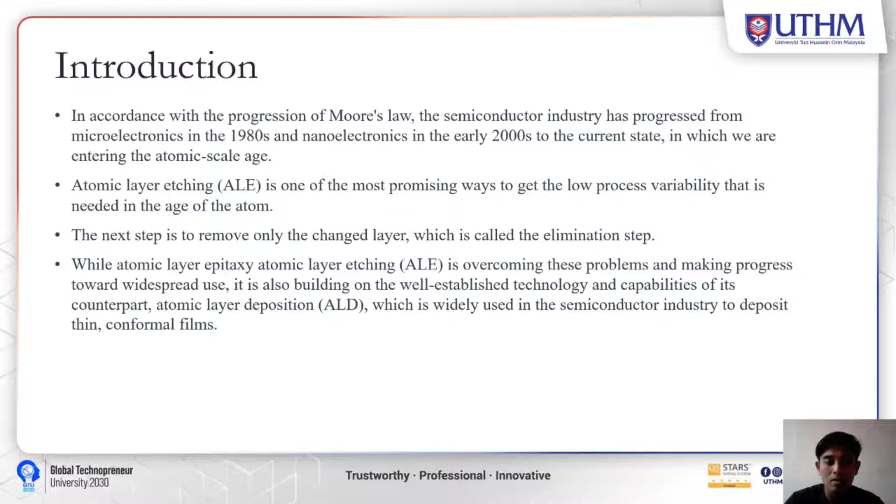The next step is to remove only the changed layer, which is called the elimination step. Ions make it possible to etch in a certain direction, which is needed to make structures that are deep and narrow. Lastly, atomic layer etching is overcoming this problem and making progress toward widespread use. It is also building on the well-established technology and capabilities of its counterpart, atomic layer deposition, which is widely used in the semiconductor industry to deposit thin conformal films. Okay, next we go to problem statement.

First, one reason is that high volume manufacturing needs to be cost effective, and a multi-step process like atomic layer etching can have low throughput because the reaction steps are slow or because it takes a long time to switch from one step to the next. One of the first studies on silicon atomic layer etching said that a single cycle took more than 3 hours. This shows how long the process takes. Most of the time, lab cycle times for silicon atomic layer etching have ranged from 1 minute to more than 5 minutes.

Second, new approaches geared toward manufacturing are being made to make atomic layer etching faster and cheaper. Atomic layer etching with plasma can be used with existing etching equipment. Atomic layer etching can be used as a final touch-up after continuous etching, and more advanced control systems can be made for faster gas modulation.

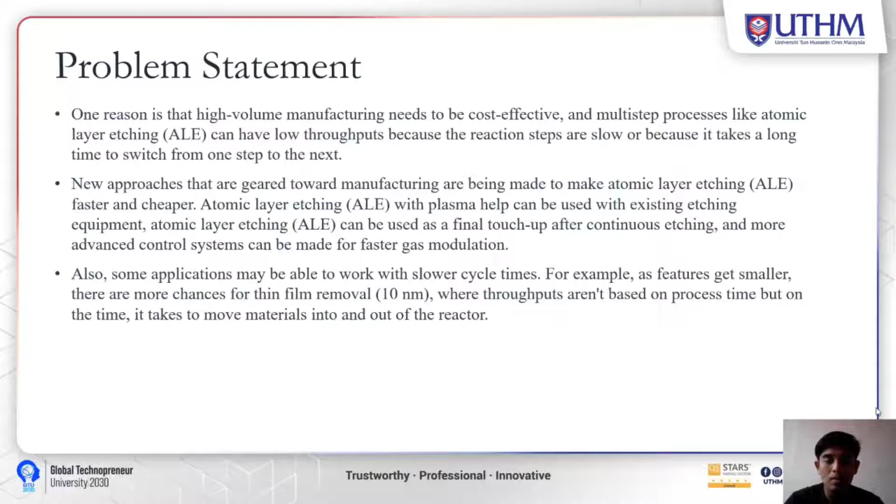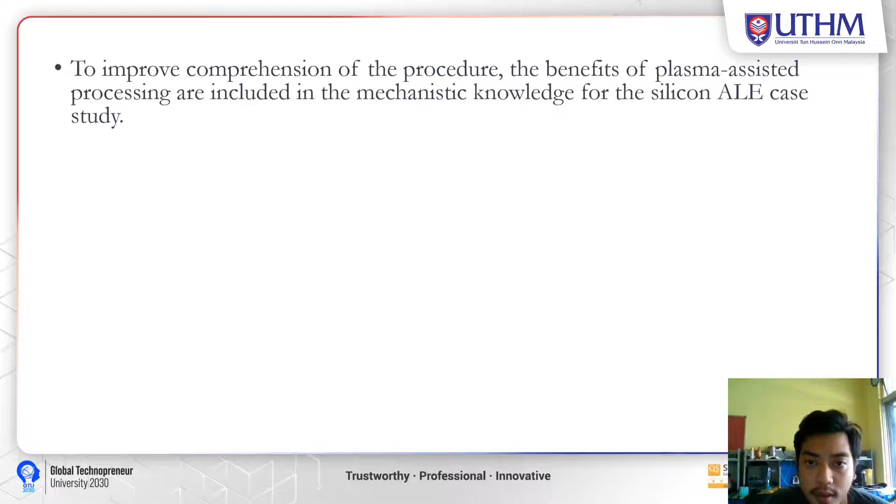My matric number is AE190031. So today I will present my part, which is the future. For the first point, to improve comprehension of the procedure, the benefits of plasma-assisted processing are included in the mechanistic knowledge for the silicon ALE case study. Next, acceptable feature size variability is anticipated to be on the order of silicon atoms during the next 10 years, including contributions from surface flaws.

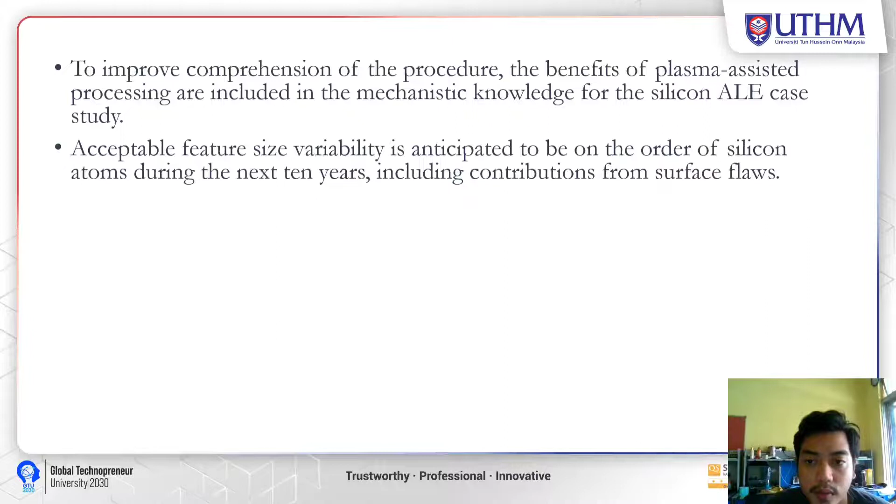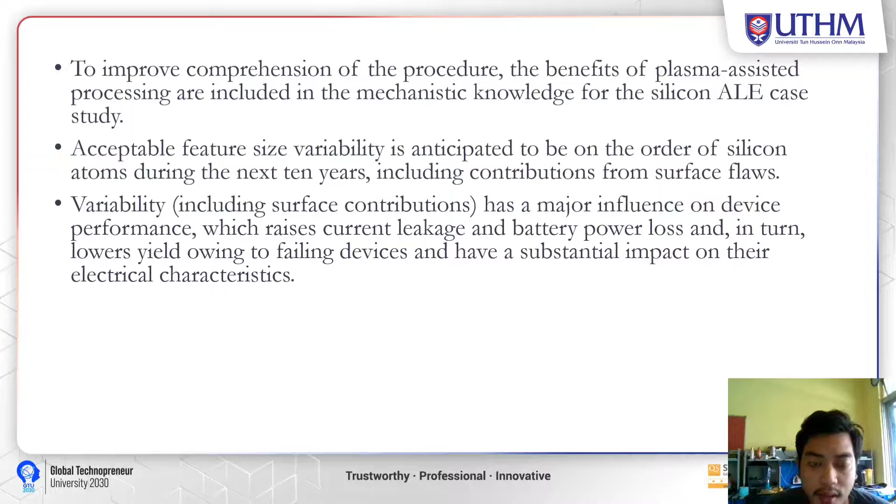Variability, including surface contributions, has a major influence on device performance, which raises current leakage and battery power loss, and in turn lowers yield owing to failing devices and has a substantial impact on their electrical characteristics. And the significance of cutting-edge plasma approaches for regulating ion energy distributions arriving at the wafer and plasma species formation routes is then brought to light for a successful plasma-assisted ALE.

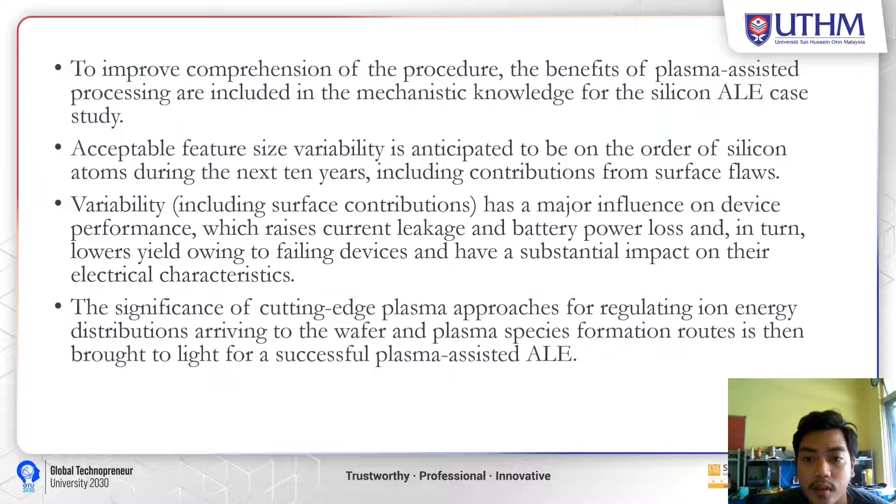Now I will explain the discussion part of our project. One of the topics in our review paper discusses the atomic layer etching ALE criteria, which consist of two steps: the modification and the removal. The modification step forms a thin reactive surface with a well-defined thickness that is more easily removed than unmodified material. And the removal step eliminates the modified layer while keeping the fundamental substrate intact.

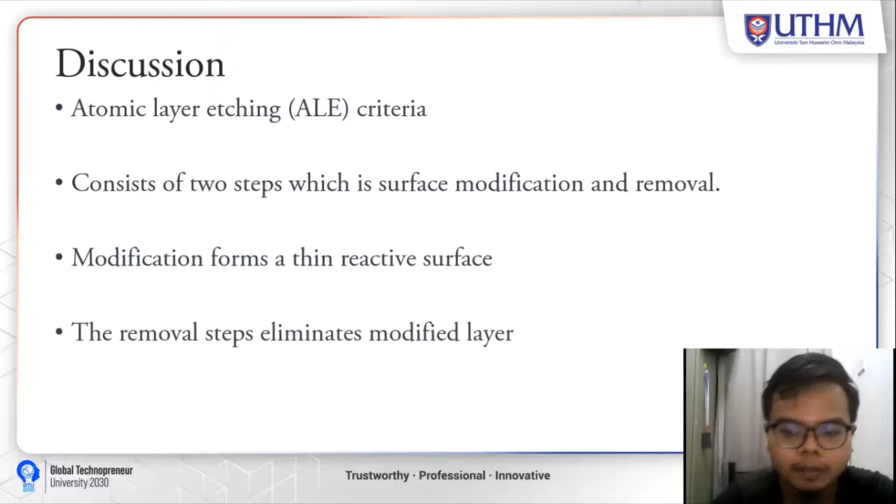Next, one of the topics discussed also involves the characterization tests, which are 3 independent tests to characterize ALE: the first is the synergy test, the second is the saturation curve, and the third one, less frequently used, involves the energy scan. These tests help to specify to what degree the ALE process approaches its ideal behavior.

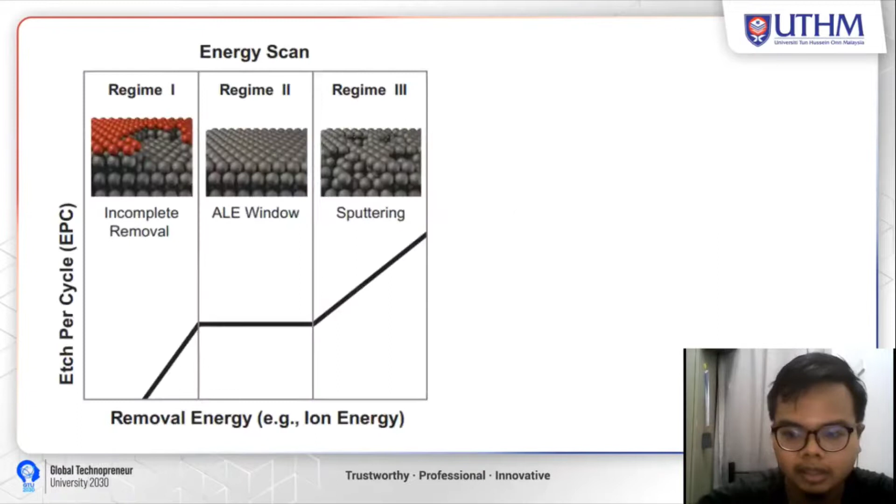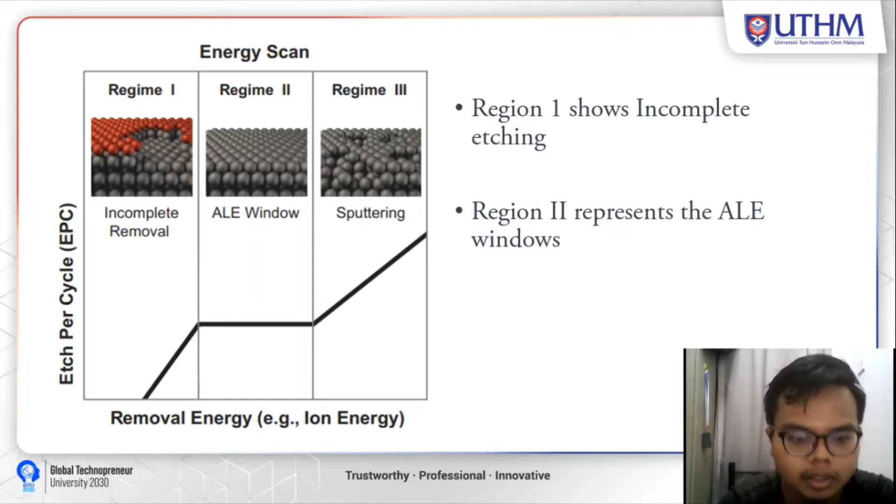So this is the energy diagram. The first region shows incomplete etching, for low removal energy. The second represents the ALE window, which exists because of the energy barrier to remove the modified layer. And the third region represents over-etching for high removal energy.

So as the conclusion, we can summarize that atomic scale semiconductors are very fascinating given the many theories and experiments done by previous scientists and researchers. Next, semiconductors have come a long way since it began in 1874 with the invention of rectifiers. And nowadays their applications range from simple circuits to complex biochemical systems. So we can summarize that semiconductors play a very vital part in our daily lives.